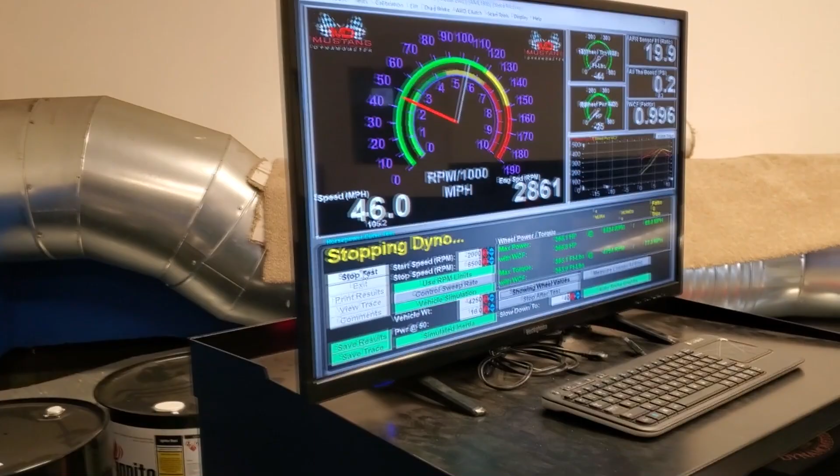As visceral as that was to be in the room watching, Travis is going to be kind enough to take me through the results again. And so what are we seeing here? We've got two runs on screen. Okay, so I kind of use the mouse, hopefully you can see it. So this line right here is our torque line, and this line right here is our horsepower line.

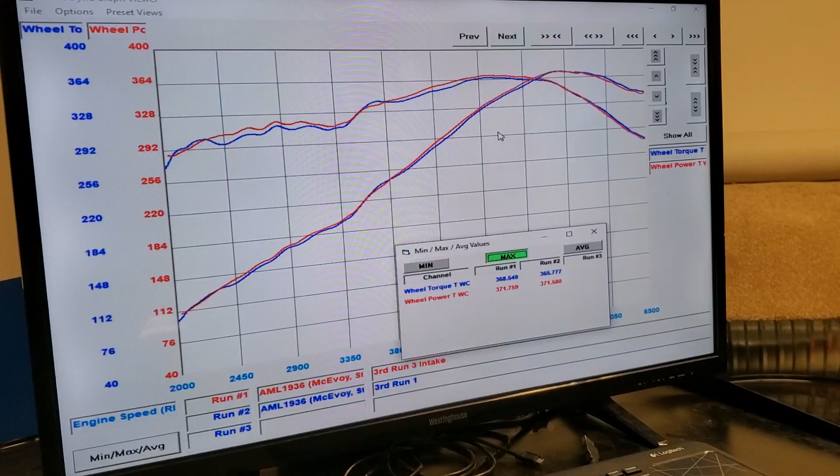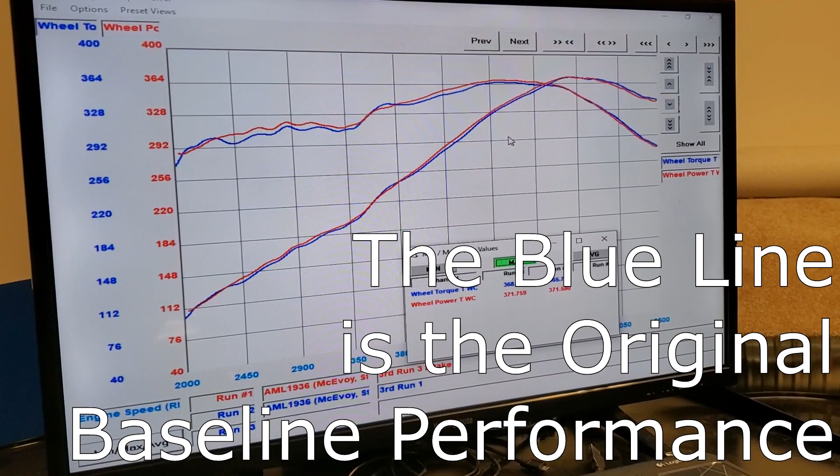Basically what I did is I split it up to where run 1 is in red, and that's after you modified and did the intake setup. And then run 2 is the blue line. That's the run that we did prior to get our baseline. Okay, so red's the new one, blue's the old one, the baseline. Yep. So it looks like there are some differences.

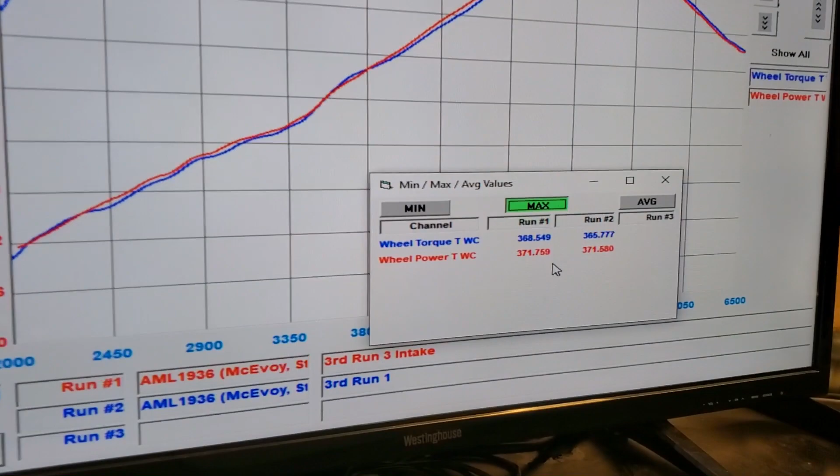So like I was saying before, I didn't think it was going to be too much of a peak power increase, which we can see here. We gained decimal points of power and a little bit of torque. So not too bad. I mean, a couple foot-pounds here. So this is our max. So this is our peak numbers that the dyno recorded during the pull.

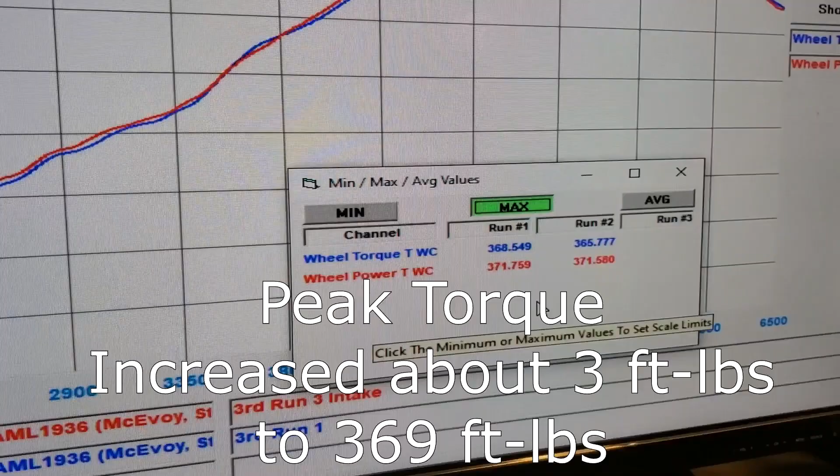So peak horsepower is absolutely the same, basically. Basically, yeah. And the torque is up maybe 2.5, 3 foot-pounds, but that's pretty small. That's pretty small. Yeah, something that if someone could feel that, I'll be impressed. But like we were saying last time, the average is what we really like to see.

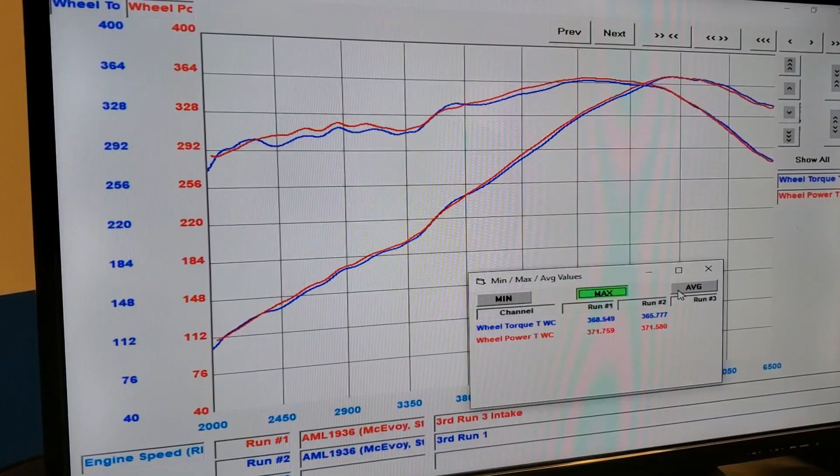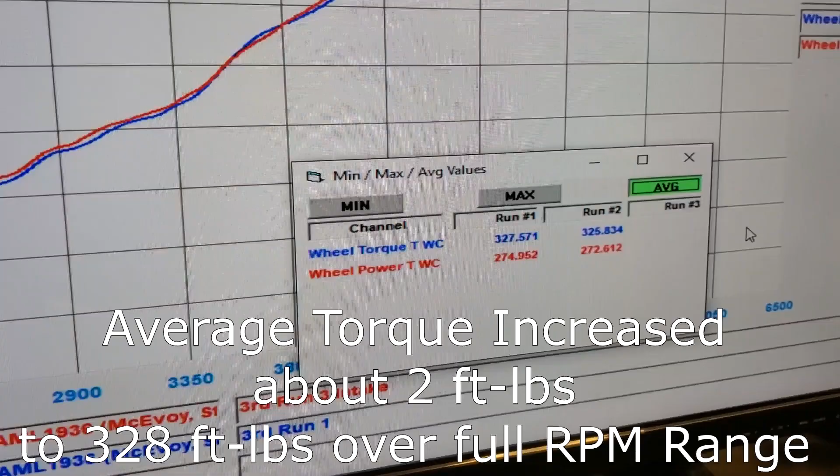So our average, we actually see a little gain here. Gaining some average power on an NA car is definitely nice to see. I mean, we went from 272, so 0.6, say 273, round it to 275. So a couple of horsepower of average power. Correct. And same thing for the torque, about the same gain. So 2.5 foot-pounds of torque on average.

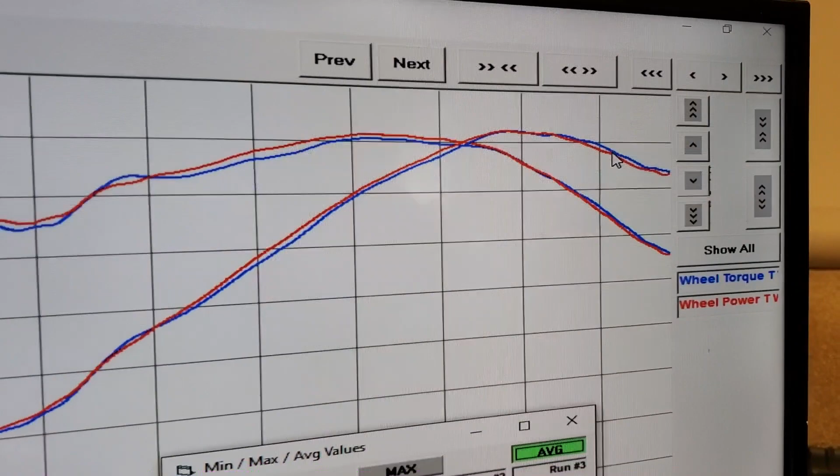And that's visible in the graphs, right? Yeah, so you can see it down here. So the biggest thing on our average is, the way we have it set up, it's taking the average from this whole entire run, which as you can see up top right here, this is where it's kind of killing us. The blue line is definitely above the red, so that's killing our average gain. 90% of the people are not going to be up in this area.

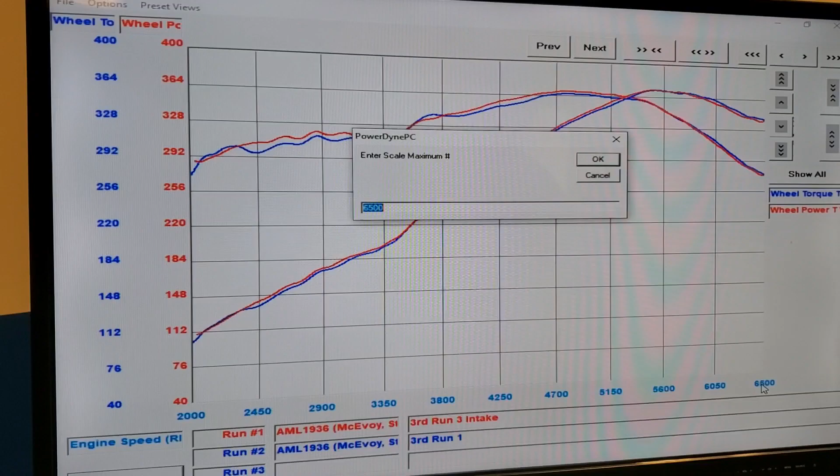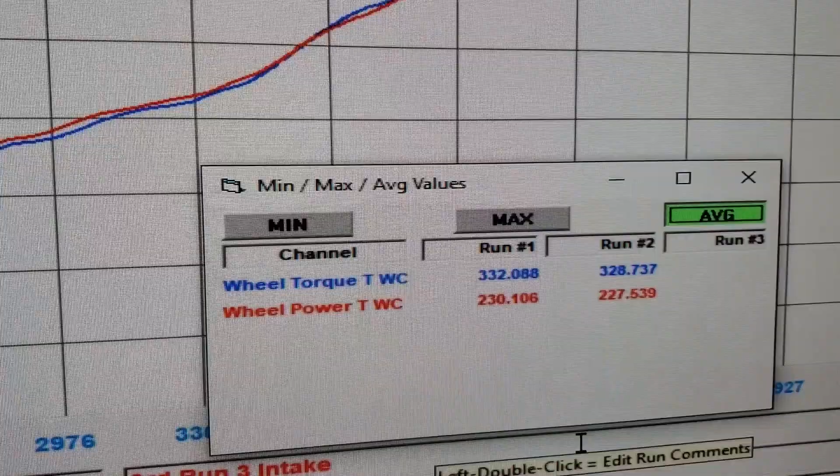So to get a real good look over the entire curve, we'll rescale the graph. And we're going to go to the 5252 split where the horsepower and torque cross over. So we'll change that, and then we'll get our average of power and torque back. Now we can see where probably 90% of someone that's going to drive this car is going to be using it, from the low end of 2,000 maybe to about 5,000 RPM. We see a nice little average split. We went up another 3, 4, and then same thing right here, from 328 up to 332.

But then you could really just look at the graph. You can see the blue line is definitely under the red line in a lot of spots. There's a little bit right here where the blue kind of wins out the race, but for the most part, the red line's above. So from about 2,500 RPM up to 3,500 RPM, it looks like the new Airbox Delete and air filter kit actually gives us a nice noticeable difference.

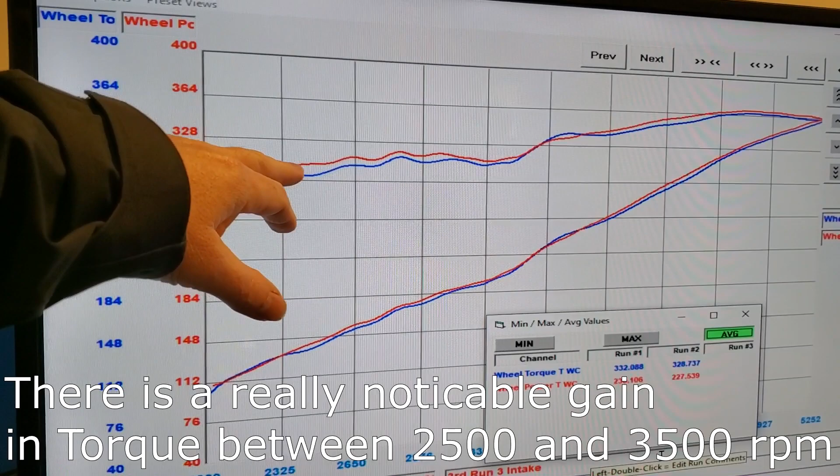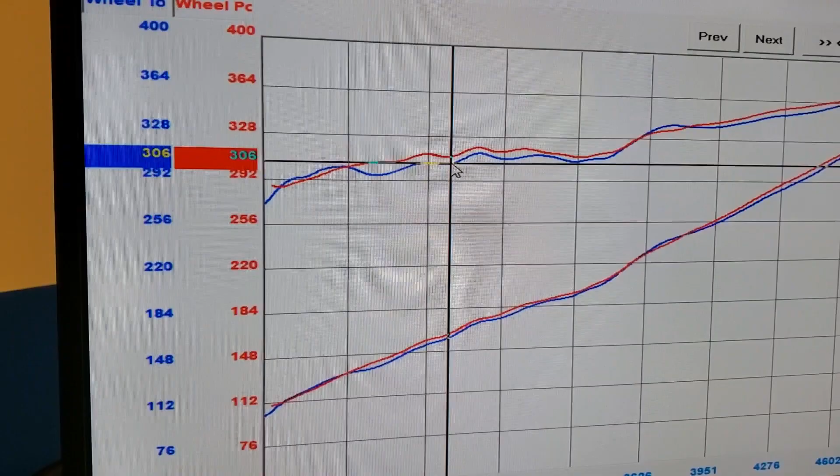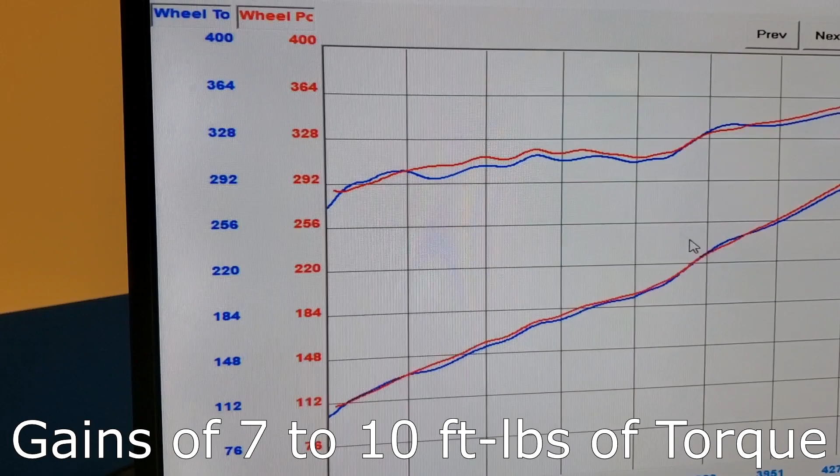Let me get the free range cursor here. So we went from about 306, and then up to like 313. We got a little dip here, 313, then it goes up to 319. This looks like the biggest split. So this is all torque right here. So 296, and we're up to like 306. So that's your torque gain right through here. So 7 to 10 foot-pounds of torque down in some usable RPMs that I might be using driving around more regularly.

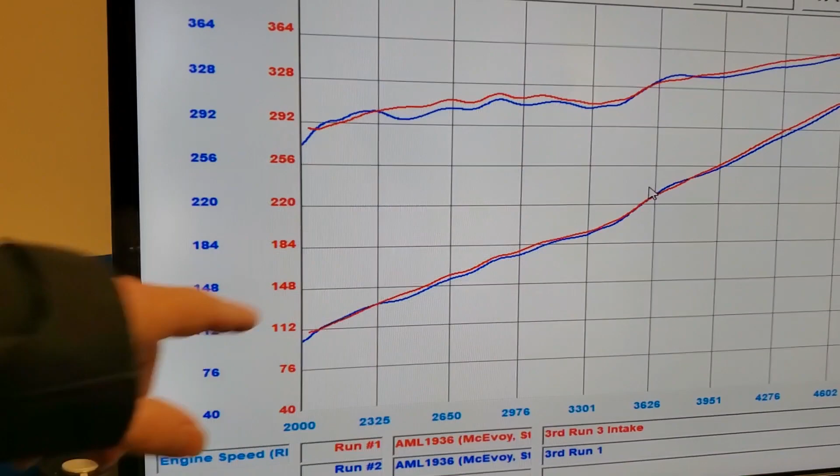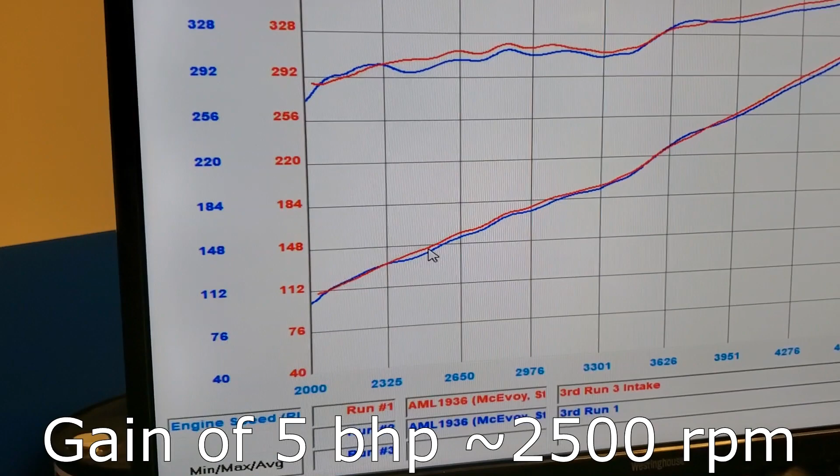And was there anything in that same region for the horsepower? Yeah, so horsepower, let me free range this, we're right around 139 at about 2486, and then we're up to 144. So maybe 5 horsepower up at that RPM, which is not bad actually. If you're cruising around town in regular drive and not flapping through the gears with the paddles, the car is going to be shifting in this area, so you're definitely going to see some nice little low-end grunt from the car down there.

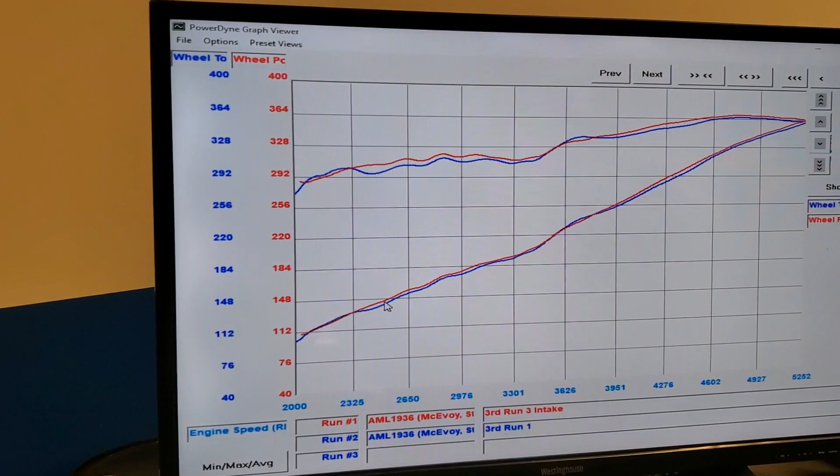Well, that was a lot of fun. So we'll be back probably in a week or two after I do the next step of performance improvement. I'm going to fit the secondary cat delete kit, and we'll come back and see how it compares to this run and the baseline.